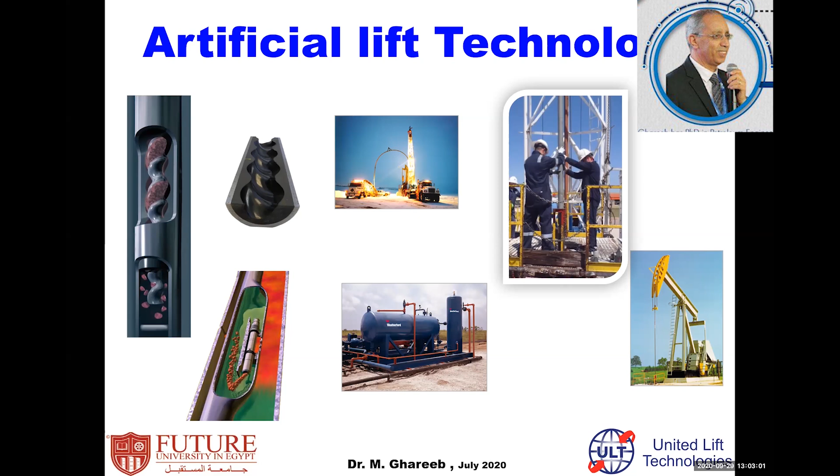We mentioned that as an artificial lift, this is the main common type of artificial lift. There are a few other types, but they are minor used. Worldwide, this is the main common type of artificial lift used, and so on.

We stopped last time for the progressive cavity pumping system at these slides. We said that the progressive cavity pumping system is one of the main artificial lift systems used for heavy crude oils. It represents the best type of artificial lift system that can be used if you have heavy crude oil with sand and so on.

It represents one of the best artificial lift systems regarding total system efficiency. If you look at the total system efficiency compared to other artificial lift methods, the progressive cavity pumping system, or the PCP pump, represents the highest total system efficiency. That means the losses in power, in horsepower, are much less compared to other types of artificial lift.

We mentioned that the main component, the main part of the system, is the downhole pump, which consists of two main parts, rotor and stator, plus the drive head, plus the rod string, which transfers the rotary motion from the surface equipment to the downhole equipment, and so on.

In order to understand the design, how to design the system, what we need to consider in design, we need to understand the pump and the factors affecting the design, because mainly I design the system, any artificial lift system, any type of artificial lift system, to produce the desired production volume that I need from my wells based on the well productivity.

Not only that, but also to lift it to the surface with a certain wellhead pressure capable of transferring the produced fluid to my process facility or separators or whatever. Then I need two things: production as a volume, and head as a lift, head, either by feet, meters, PSI, whatever you have.

Then in order to understand how the PCP is working, how it generates the pressure or the lift, how it's produced, what's the function of the production related to the PCP, you need to understand the system, the geometry of the system, the configuration of the system, and so on.

The PCP, or progressing cavity pump,

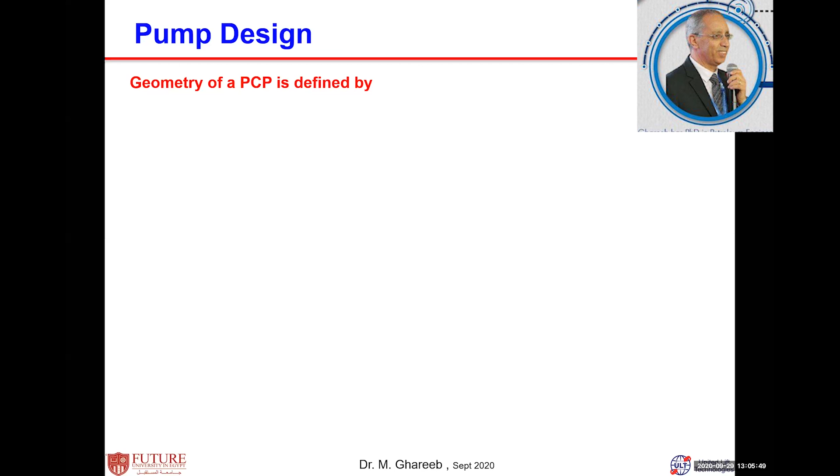Remember, I said that downhole pumps have two parts, the rotor and stator, the rotor rotating inside the stator. One of the main important parameters in the geometry is the rotor's diameter. What diameter do these rotors have? The rotor diameter is the cross-section diameter of the rotor. But remember, these rotors are not a straight bar of steel.

No, the rotor has a different shape of steel. Then I have two diameters in the rotor. One is called the minor diameter, the normal diameter of the rotor, also called nominal diameter. This rotor, when it rotates around itself, has a major diameter. Major diameter is the bigger diameter.

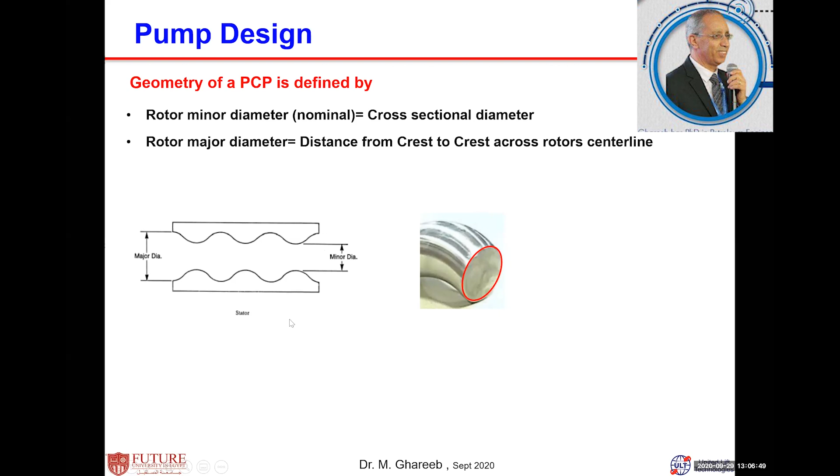In the rotor, major diameter is a distance from crest to crest. Because as the rotor runs inside the stator, this is a crest and this is a crest. This is the shape of the rotor. From here to here is the rotor minor diameter. And from here to here is the rotor major diameter.

From this crest to this crest of the rotor, it is rotating around its center line, around its shaft. Then you have two diameters here for the rotor: the minor diameter, the small diameter, and the major diameter, the big diameter, like this.

Plus eccentricity. If you look at the rotor and stator, there's some eccentricity. As it's rotating, you have two center lines here: one center line for the minor diameter, and one center line around the major diameter. Then between these two, there is a cavity area, a small area called eccentricity.

Then the eccentricity is the distance between the rotor minor and major center lines. From this to this area is called the eccentricity of my rotor.

And so on. Plus, I have another factor. What is a pitch? Pitch is where the fluid can accumulate, here and here and here, like the stages, where it can hold the fluid. There are different pitches here. There is what we call the rotor pitch, from crest to crest. This is the rotor pitch, from here to here.

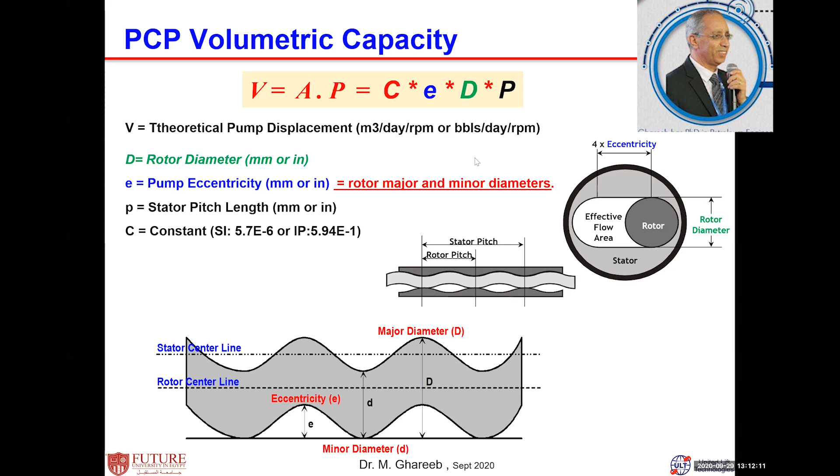If you rotate your rotor one turn, this will be the displacement. But usually I design my system to rotate more than that in order to achieve my production. Based on the production I require, I rotate my system, and the number of rotations is equivalent to the production I need. Then the volumetric rate of my production, the theoretical rate, is equal to the theoretical pump displacement multiplied by the number of rotations, just how many turns the PCP is turning.

But remember, during operation there is a differential pressure across each stage, and due to that differential pressure there will be slippage of the fluid. Part of the slippage will go back again to the previous stage because of the delta P, and this depends on the type of materials, what the seal line or seal points are, how much the rotor and stator seal to each other — all that affects the volumetrics, or what we call the slippage flow rate.

There is a part of the flow rate with slippage, which is a function of the volumetric efficiency of this system. The slippage rate is dependent on the rotor-stator fit, how the rotor and stator fit to each other. The rotor-stator fit is really a function of the pressure, how much pressure I need to build up, and so on — there are different factors and parameters that affect that.

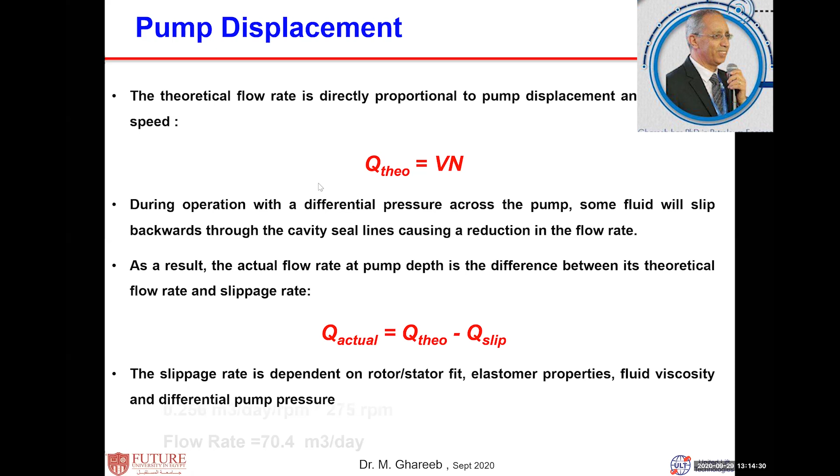Now this is an example in the metric system. I'll show you how to calculate the pump displacement and theoretical flow rate, the pump displacement per RPM, and the theoretical flow rate. With the pump: eccentricity equals 6.2 millimeters, rotor diameter 39.2 millimeters, and stator pitch is 185 millimeters, operating at a speed of 275 RPM. First, I need to calculate how much displacement per 1 RPM, per 1 revolution.

According to the metric system, I need to use this constant value, multiplied by E which is the eccentricity, multiplied by D which is the rotor diameter 39, multiplied by the pitch. Then the pump displacement equals 0.256 cubic meters per day per 1 RPM.

This gives me a good configuration of how much production I need as a function of each 1 RPM. If I run the pump at 100 RPM, what will be the production? At 200 RPM, what will be the production? At the end, the theoretical pump displacement downhole will be the displacement per 1 RPM multiplied by the RPM, how many revolutions per minute.

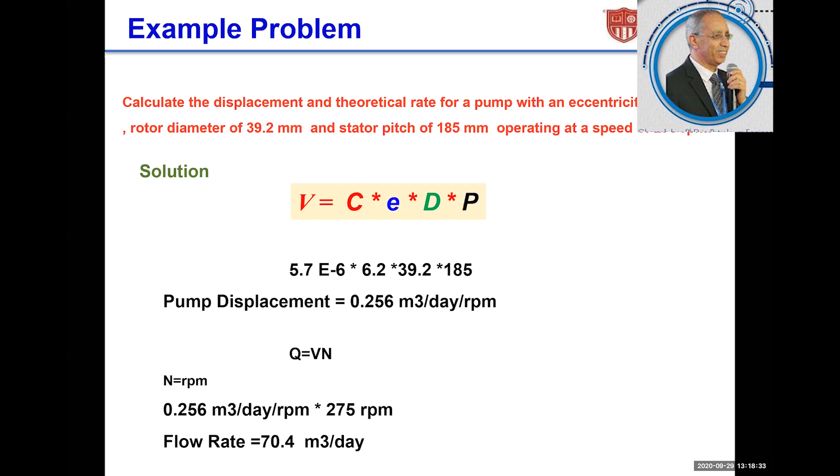A high percentage, the majority of conventional pump models have a nominal lift capacity of around 70 psi per stator pitch. For each pitch of stators, I have 70 psi. That means for each cavity, since the stator is 50% of the cavity, you have 35 psi per cavity. This is a cavity at 35, this is a stator pitch at 70 psi. That means if I want more pressure, I need to increase the pump length to get more pressure than that.

There is another value for pumps that can be built instead of 35 psi, because other pump manufacturers can manufacture pumps with different downhole configurations, and this also depends on the lobes of the pump and how many seals it has. So yes, this figure can be a little different, but if you don't know anything and start to talk about how much pressure, use that value, 35 psi per cavity or 70 psi per pitch.

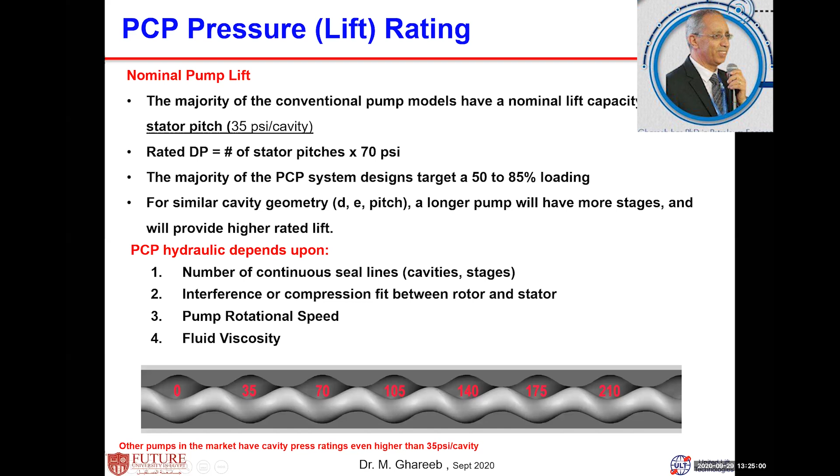Fluid viscosity - all these factors affect the hydraulics of the pump. Then, for design and selection, try to remember all this when you start to use software or do hand calculation. I recommend using software for ease.

For the completion information, you need to have all that. What is the setting depth? Because setting depth is a function of the delta P pressure you need to build, with a function of the reservoir pressures and so on - bottom hole temperatures will be a function of the depth. Well deviation - I need to have well deviation. What's the maximum on this well?

Especially the diameter of the tubing and so on, and gas separator or sand screen, what I have downhole - there is a tailpipe, all the downhole, and what type of downhole configuration I have - all this I need to consider while designing my system.

Also the operating and production information - what is the total liquid rate? Remember, total liquid rate is oil and water and so on. What is the total flow rate? Oil, liquid plus gas, water cut, sand content or sand cut, maximum and minimum operating RPM.

What's the maximum RPM I should run, or is there a specific minimum RPM? This is just a mechanical fact you need to consider based on the availability of your equipment or system, plus tubing size and head pressure. What's the wellhead pressure against what pressure I need to flow or pump my system?

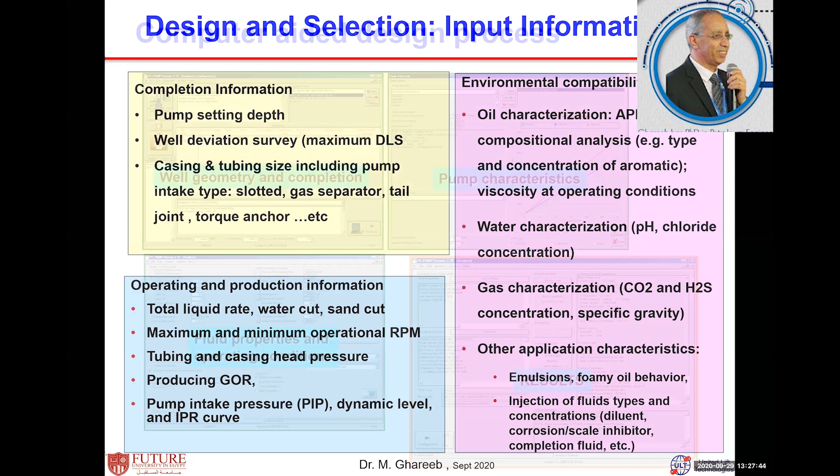However, as I said, hand calculation can be easy and useful for a very simple condition, but it's not accurate. Usually for PCP, you need to consider a lot of factors - you need to simulate a lot of downhole conditions and parameters.

Depend on what? Depend on my pumps and pump configuration, manufacturing, equipment types, metallurgy of downhole equipment, well completion condition, well deviation condition - a lot of factors. Usually software takes from you all the parameters we have; it will ask you about a lot of parameters for the simulation.

There is also input needed from your side to select what parameters you need to input, because if you input the wrong parameter, you will get a wrong design or an inaccurate output result. However, there is software that can help you a lot, but in order to run the software, you need to understand what to put in it.

Software sometimes gives you two choices - do I need to use this or that? You need to decide this or that based on your background about the system, how the system runs, and how this affects it.

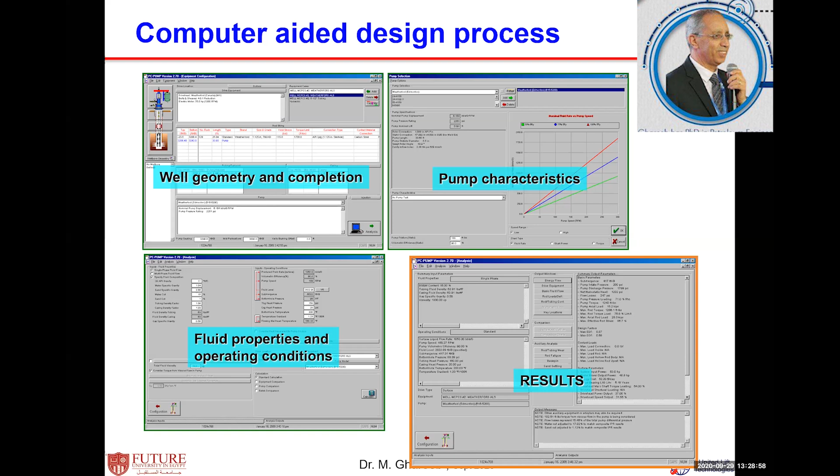This is just a general overview about PCP design. At the end, like artificial lift, like the PCP, the ESP, and so on, the pump can have some nomenclature, usually according to ISO. The pump nomenclature has parameters - the first parameter tells you how much the pump can produce, how much pressure the pump can build. Usually the nomenclature starts with the nominal capacity of the pump.

How much, either cubic meters, this depends on what units you use. Either it will be cubic meter or barrel per day, nominal diameter for 100 RPM. For example, this one tells you this pump can produce 32 cubic meters per day for 100 RPM. If I run the pump with 200 RPM, then this pump can produce 64 cubic meters per day.

And this is the second number, it's the nominal head in meters. This pump can lift 1,200 meters as a nominal head. And also this third number is dependent on the manufacturer, and this can be different from one manufacturer to the other.

And it's very important, it's the elastomer code. It's very important to select this correctly, because elastomer is 50% of your pump, part of the pump. Elastomer is one of the main sources of downhole pump failures. Remember, elastomer is the weakest point. Elastomer is the main source of downhole pump failure.

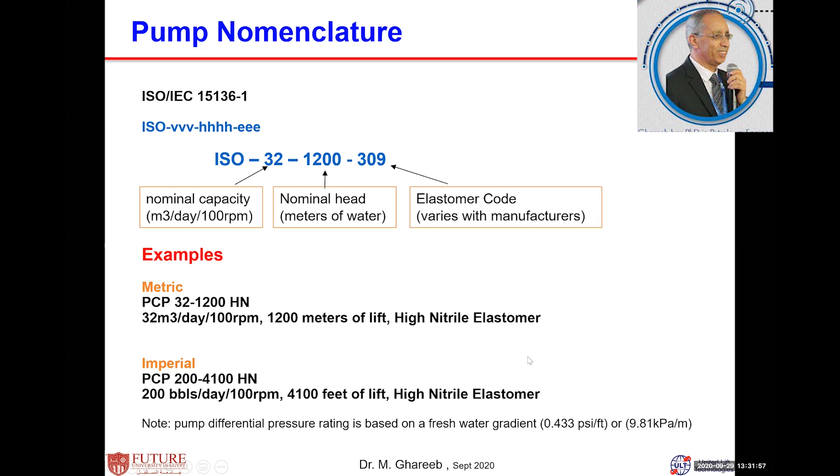Then pump differential pressure rating also is based on, this is all when the manufacturers give you the rate, based on fresh water gradient. Because they did the test here in their plant or workshop, they do the test by using fresh water. Then you need to convert this, if you want to calculate by feet or meters, you need just to convert this to your fluid type.

Let me give you some hints about fundamentals of gas lift. What is gas lift? How does gas lift work? What is the main component of gas lift? Remember, this course is a fundamental. You need to know the components of the system, because you will not be able to design, you will not be able to troubleshoot, you will not be able to analyze the system if you don't know the main components. What's the component of the system, how it's working with each other, how it reacts to each other, and so on.

Gas lift is one of the common artificial lift systems, but the percentage of use is less than rod lift, less than PCP. It can be the same like progressive cavity, in some areas can be high, in some other areas can be low. However, gas lift is one of the good artificial lift systems that can be used offshore if it is capable to lift my fluids, because the gas lift, as we'll see later on, it's like a flowing well.

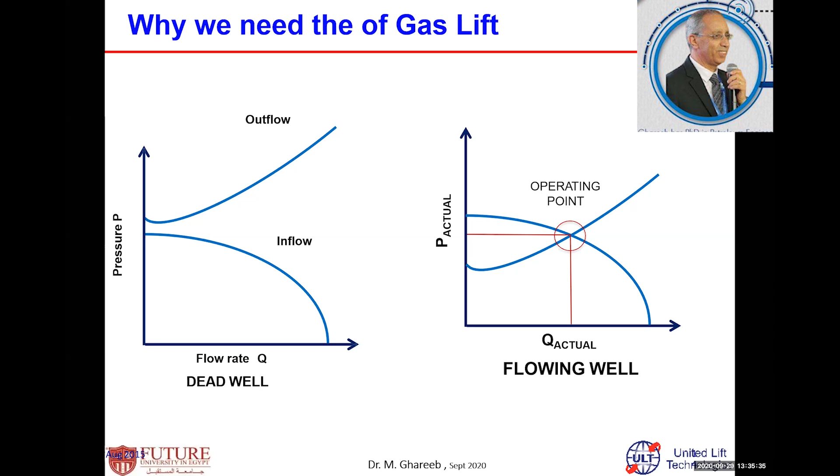What is the gas lift? Gas lift is a form of artificial lift. In most conditions it closely resembles the natural flowing well. This is a flowing well, this is the casing, this is the tubing, this is the packer. Fluid comes from the formation and there is enough bottom hole flowing pressure, capable of lifting the fluids up to the surface and overcoming the pressure losses inside the tubing and the wellhead pressure in order to reach the flow.

This is a flowing well. If you look at gas lift, it's almost the same completion, packer, flowing well, except I'm increasing the volume of gas relative to the liquids. So I just simulate it like a flowing well with some gas artificially injected, making it an artificially flowing well.

The gas lift usually uses natural gas, compressed and entering the tubing at a certain point at the bottom, where it mixes with the produced fluid and lifts this fluid.

The compressed gas can be natural gas - the majority of gas lift wells use this - but in some small, special cases it can be air, under certain precautions, or a mixture of gas and air, for small applications in shallow wells. However, over 95% of gas lift wells use natural gas to produce.

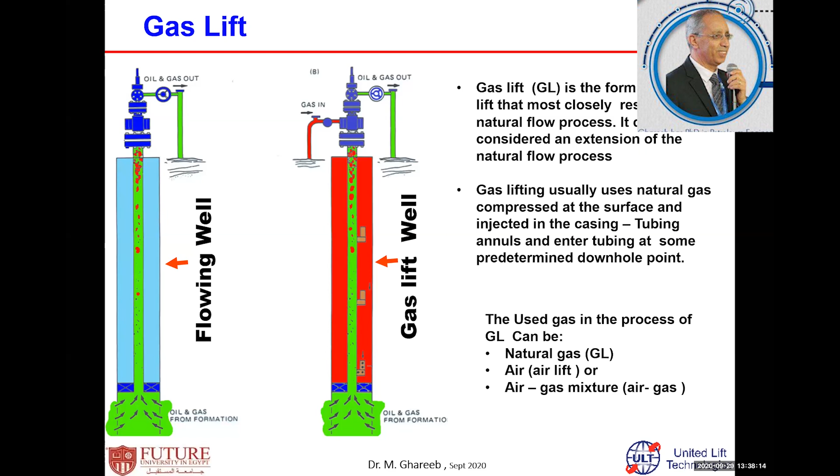What's the advantage of gas lift? Since it's like a flowing well, it has plenty of advantages. Gas lift has a high degree of flexibility in design rate, because I can change the volume of gas, I can change the depth of gas injection, and I can do a lot of simulation to have flexibility in my production. I can change my outflow curve up and down, depending on downhole conditions.

The gas lift is a very simple artificial lift system. There are no downhole pumps - all the gas lift downhole equipment is mainly downhole valves. I can retrieve or run and do all the downhole operations using wireline retrievables, slick line, with just a very small tool at the surface, to retrieve these valves.

For that reason, gas lift is one of the good artificial lift selections for offshore operations, because it doesn't require a rig. If I have any problem, the equipment needed is very small, just 1 ton or maximum 2 tons, and I can send it to the platform, do the operation within a few hours, and send it back using the helicopter.

It can handle sand conditions very well because there is no moving part, and the tubing is open and full like this, allowing for tubing drift. If I need to run any wireline operation, PLT operations, through-tubing perforation, or whatever downhole operation, I can run it inside the tubing, just like a flowing well.

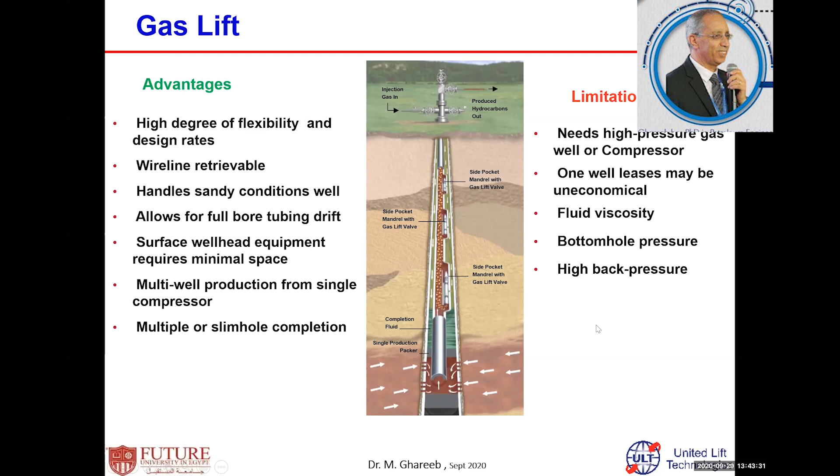Then, gas lift - as a principle of gas lift, let me talk you through a little bit about what is the principle of gas lift. We said gas lift is similar to a flowing well but with injecting gas - it's artificially making the well flow. What is the principle of gas lift? What is a conventional gas lift? If you look at this one, it's my normal completion.

When they inject gas here, the gas mixes with the fluid inside the tubing. This reduces the fluid gradient and helps push the fluid up inside the tubing and up to the surface. The gas is injected into the annulus - meanwhile the gas travels down the annulus like this, and there is a regulator, called the gas lift valve, which regulates the amount of gas I need to inject inside the tubing.

Then the injected gas, mixed with the fluid in the tubing, reduces the density of the fluid to a point where my bottom hole flow pressure can lift this fluid to the surface. This is a very simple way of how gas lift works. Usually only one valve of the gas lift is operated. Even if you have more than one valve in the gas lift completion - we'll see later on why I have more valves - in normal operation only one valve is working, just injecting gas inside the tubing.

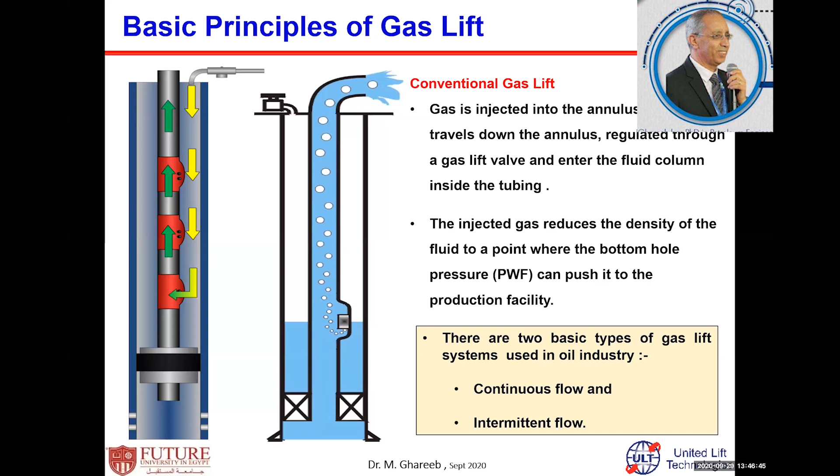If you look at this shape, continuous flow means if I continuously inject gas in the casing over 24 hours, continuous gas, it doesn't stop, that's a continuous flow gas lift. What if I inject gas lift as a cycle? I inject gas for a period of time, then stop for a few hours, then inject gas again, stop again, inject again. This is what we call intermittent gas lift, so the gas injection is not continuous. When do you use that, and what's the difference between intermittent flow gas lift and continuous gas lift?

Let me give you some hint about continuous flow gas lift. In the continuous flow gas lift process, relatively you have gas at a certain high pressure continuously injecting into the casing, which then enters down through the downhole valves to the tubing and mixes with the tubing fluid.

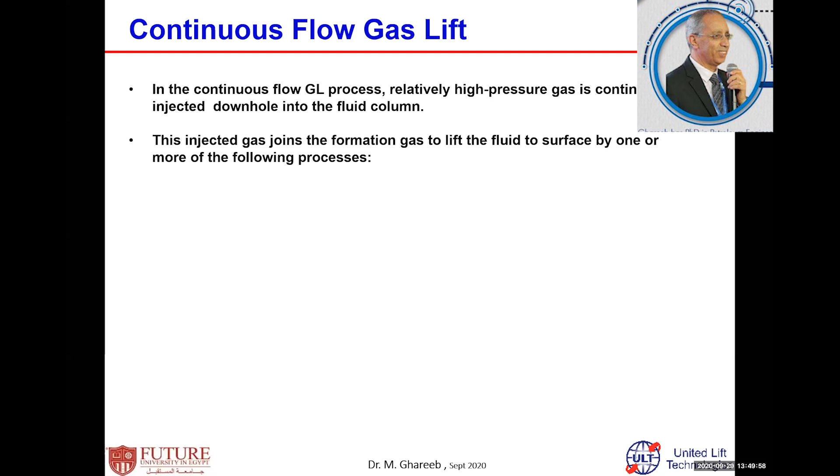Remember, when you have two-phase flow inside the tubing in the vertical line, there are different flow regimes depending on gas-liquid ratio, flow properties, the gas, the temperature, and different factors. Then when the gas mixes at the valve, the injected gas with the formation fluid, the first principle is just lifting, or helping the gas flow to the surface. The first principle is reducing fluid density, mixed with that.

If it's a bubble flow like that, or just some mixing fluid, this is what we call gas, and this is liquid - we have mixed flow of gas in the liquid like this. The first principle here is reducing the fluid density, and consequently reducing the weight of the fluid column inside the tube.

The second technique, or second help for the gas, happens when the gas starts to go up - the pressure in the gas starts to decrease, then the small bubbles of gas start to expand and become bigger bubbles of gas. The expansion of the injected gas, commingling with the gas in solution, pushes the liquid ahead further. This works by pushing the gas, pushing the liquid, and helping the flow push up to the surface.

Not only that, there is also displacement of liquid slug. When the gas starts to go up more, the bubbles of gas increase, and the flow regime starts to become like slug flow. For slug flow, each slug of gas pushes a certain volume, like a different type of artificial lift.

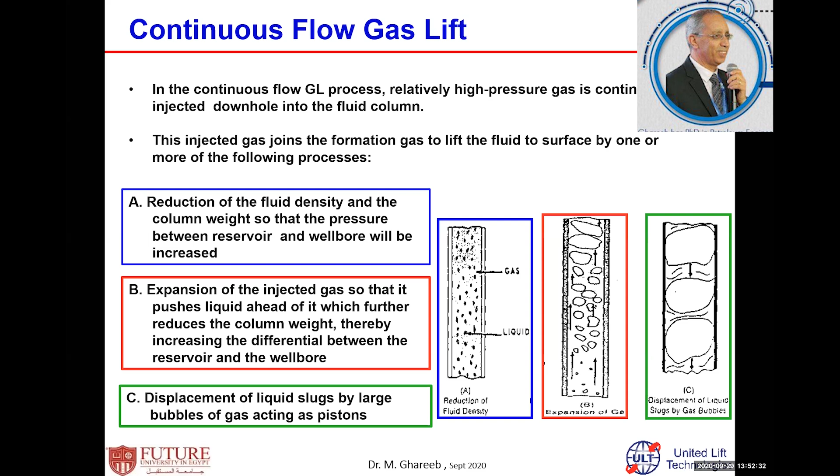What for intermittent gas lift? How is it working? Intermittent gas lift is usually used for low producer wells, low productivity wells, low permeability wells, wells which cannot produce continuously but still have a good quantity of gas. There's a good quantity of gas, but the downhole pressure is low. Then what we use here is what we call gas assist. The gas lift assists the well to flow.

This is what we call fluid accumulated downhole with time. When the fluid is accumulated downhole, due to the length of these fluid columns, the pressure is not able to lift it to the surface. Then if I use gas lift, I put a gas lift valve down to a certain depth downhole in the well near the packer, and inject gas. When I'm injecting gas, the gas comes here and pushes this slug of the flow here, and lifts it to the surface.

Then in intermittent flow gas lift, fluid is allowed to accumulate. What this means is I stop the well for a period of time, then the formation starts to produce inside the well, but not up to the surface. It produces inside the well until a certain static condition is reached, then the well is stopped. This is what you call the inflow cycle period inside the well.

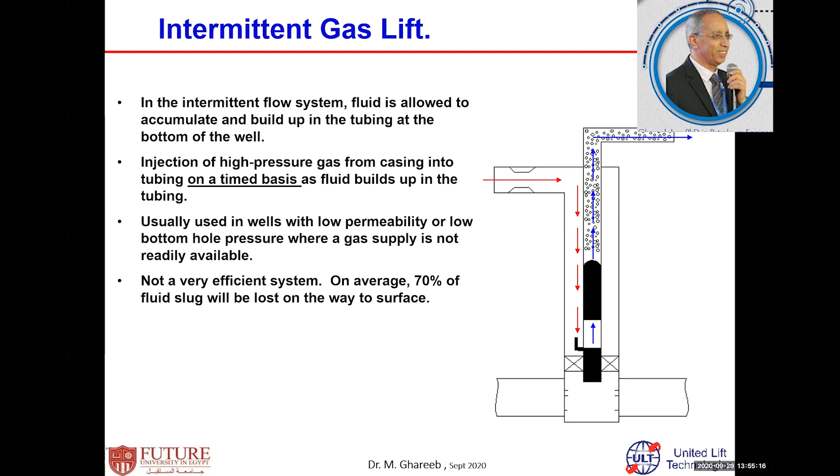What is a gas lift component? This is to achieve the benefit for me, or to make this gas lift work, and so on.

As with all types of artificial lift, they have two main parts: surface components and downhole components. For the gas lift, the downhole component is a simple component. Mainly, it has what we call valves. This is the main component, the critical component in the system. It's called the gas lift valve, like the pump in a pump system. In the gas lift, the valve is the heart of the system.

Then I have the gas lift valve. But for other types of artificial lift, usually I use one pump. For the gas lift, I use more than one gas lift valve. For sure, there's a difference in some settings and so on, but there is more than one gas lift valve installed inside it.

But how is this gas lift valve installed inside the tubing? Usually, the gas lift valve is installed inside the tubing in this area, inside a device called a mandrel. This is what we call the mandrel, in which the gas lift valve can be placed.

Then for the completion of my well for the gas lift, usually I run the tubing with the mandrel connected to the tubing at the depth which is designed beforehand. I design where I need to run my gas lift valve. Then I say, okay, I need to run the first mandrel at 100 feet, I need to run the second mandrel, for example, after 1,200 feet.

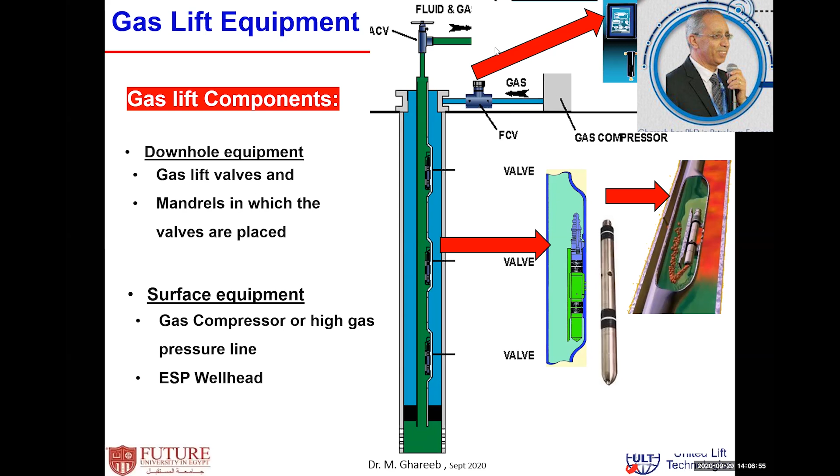Other equipment—one of the main equipment for gas lift—is the gas lift valve, and the gas lift valve is the heart of the system. The gas lift valve is usually used to control the flow of injection gas—how much gas I need to inject inside the tubing. The gas lift valve is placed inside the mandrel like this, and when it's open, it controls the volume of gas that can flow inside the tubing, depending on the pre-designed volume of gas needed to create a certain gas-liquid ratio in order to lift the well. When it's placed, the gas lift valve inside the mandrel creates a kind of communication.

If you look at these ports, there's a port inside the mandrel, and it's against the port inside the gas lift valve. When these ports communicate with each other, gas is injected into the casing, and when the gas lift valve reaches a certain delta P between casing and tubing, it's open and allows a certain volume of gas to go through. The operation of the gas lift valve is determined by preset opening.

Usually in the lab, I preset the open and close pressure for this valve by injecting a certain volume of nitrogen gas. There's also an old type of gas lift valve that uses a certain spring inside. I preset it so that if the delta P across the valve reaches X PSI or X bar, the valve should open and allow gas from the casing to enter the tubing.

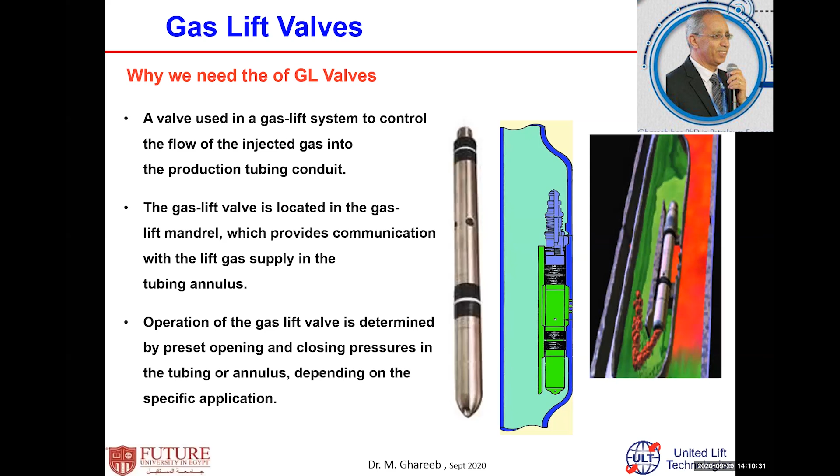The main category of valve type depends on when I need to use a gas lift valve, and what the function of this gas lift valve is.

In a completion, if I have more than one valve, the additional ones are called unloading valves. If I have only one valve, it's called the operating valve.

As a principle, all gas lift valves are designed to stay closed, until a certain condition of pressure in the annulus and tubing is met.

What does that mean? Usually the valve is preset at surface. Then, until I reach a certain pressure across that valve, the delta P between the casing and tubing, the valve will stay closed. When I reach that certain delta P, the valve will open.

For that reason, I put a certain number of gas lift unloading valves, in order to help reduce the horsepower and the gas pressure required to start the well, especially if the well is stopped or has just come off a workover condition.

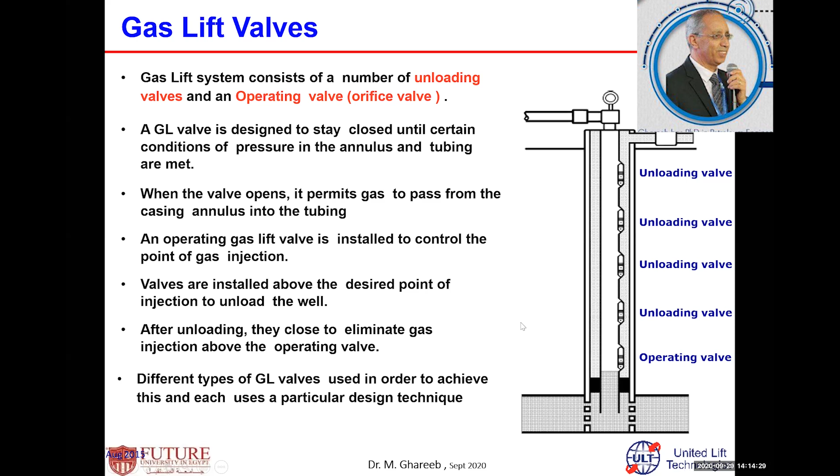So the gas lift valve is divided into two main categories, both as a principle of function and in terms of operation principles.

The manufacturing found that it's needed to have a different valve due to well condition and the need of the wells. However, I will not go into details of that, but I would like to show you what type of valves are in the market and how they respond.

Usually there are two main types of gas lift valves in the market. One is called injection pressure operated gas lift valve, IPO, which usually responds to the injection gas pressure. The other type is production pressure operated gas lift valve, which responds to the flowing production pressure. One responds to the pressure on the casing to open or close, while the other's response depends on the pressure of the fluid flowing inside the tubing.

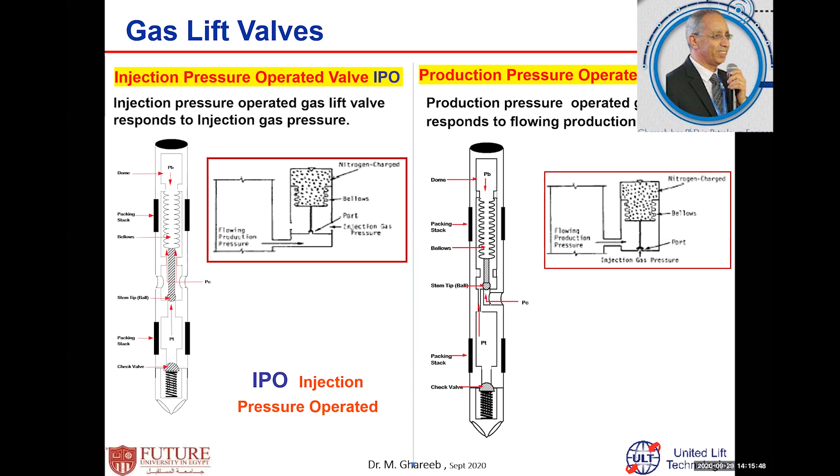Gas lift valve - what's the function of the gas lift valve, and how can it help me? First of all, as I said, it helps me in unloading the wells, just to reduce the volume of gas and reduce the pressure of gas required to inject for unloading the wells and so on.

It also provides flexibility for any change in the well. I can adjust the volume of gas and adjust the production depending on the downhole condition - if the bottom hole flow pressure changes, if the water cut increases with time. Do I need to increase or decrease the gas volume? Do I need to change the depth of gas injection? What daily production do I need - do I need to increase it, or do I have a problem and need to reduce it?

Well deliverability and so on - that means the gas lift valve provides me the means of controlling gas injection and controlling well production. It allows me to optimize the well and control it to produce as per my request, depending on the downhole condition. I can change the parameters to match the downhole condition, the well condition, and so on.

For unloading, let me give a quick view to help understand the sequence of unloading and how it works. This well, for example, is full of liquids in both casing and tubing - the same liquid. If you measure the fluid gradient inside the casing and inside the tubing, it's the same gradient, since it's the same fluid.

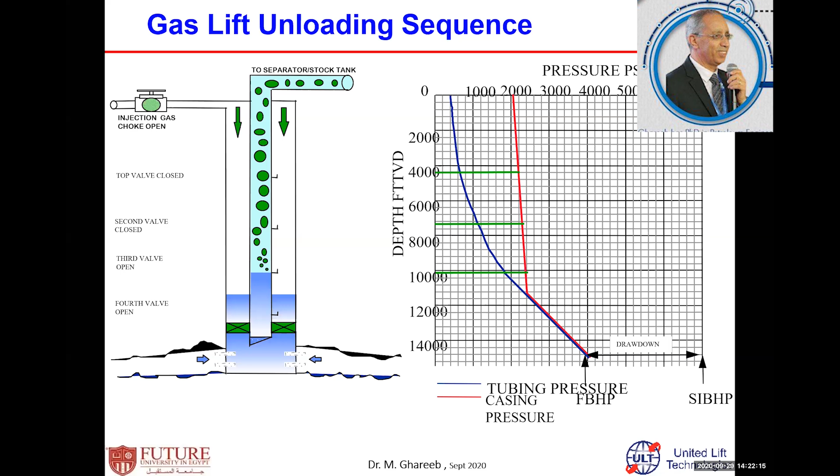The second part in my gas lift equipment is the gas lift mandrel. What is a gas lift mandrel? As I said before, the gas lift mandrel is a place in which the valve is placed, the equipment in which you place your valve. This is the main function of the gas lift mandrel.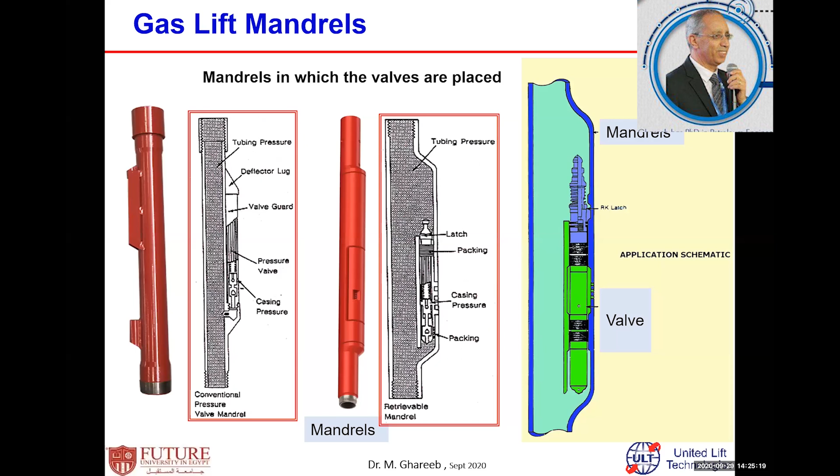Since it's flowing wells, you need all the parameters that can affect the flowing wells. You need to know all the parameters which allow you to select the suitable gas lift valve, how to select the depth of the gas lift valves for unloading, and how to select the depth of the operating gas lift valve, and so on.

Then I need to know, because I will run this gas lift valve as a conventional or as side pocket mandrel, what's the tubing size, what's the casing size, and what's the depth to the center of perforation?

Because I will inject gas, I need to lift fluids. In order to lift fluid, I need to calculate the bottom hole flowing pressure. Here I work with the bottom hole flowing pressure, not the pump intake pressure.

Then I need to know the depth of perforation, the fluid API gravity, and the formation gas liquid ratio. This is one of the tools that can help me know if it's high or low, and by how much, in order to calculate the new gas liquid ratio, the production and injection pressure, and so on.

Specific gravity of the injected gas and the produced gas. Do I use the same produced gas to inject, or a different gas? If I use a different gas, what specific gravity is it? What's the daily production? Specific gravity of water, if there is water.

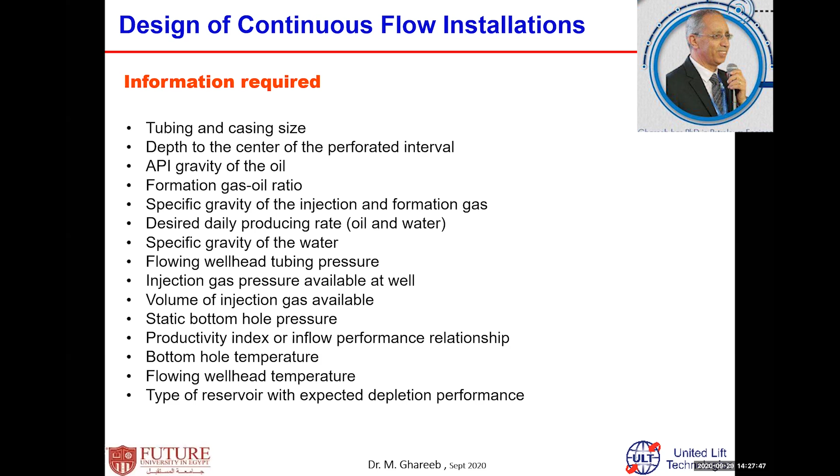There are several different methods you can use for designing gas lift. One of the methods depends on, remember the two main valves I mentioned, whether I will use IPO valves, injection pressure operated valves, or production pressure operated valves, and so on.

Do I need to use a manual calculation? Usually manual calculation is not accurate. There's a lot of error in manual calculation. It can give you rough figures about what to have. Some people use it when it's not a high gas oil ratio, and you control the gas oil ratio.

For gas lift wells, you need to simulate the flow regimes, the vertical flow. Remember I said continuous gas lift depends on three processes inside the tubing: either reduce the fluid gradient, use slug flow or plug flow, or use mist flow - whatever type of flow supports and helps you produce the well.

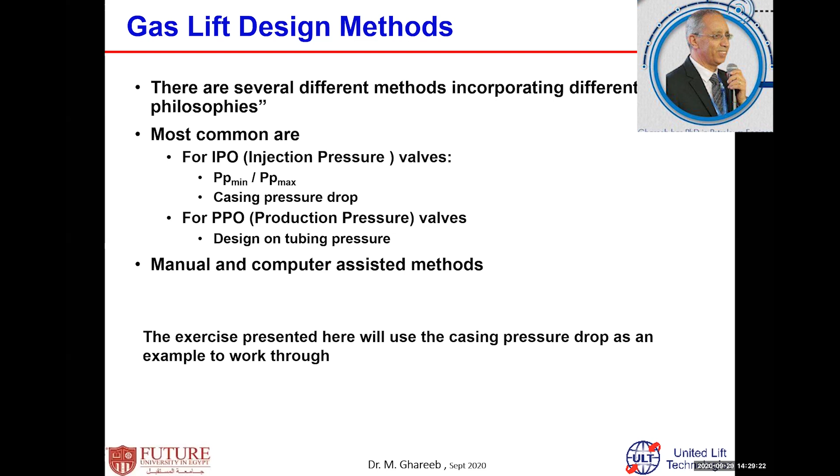There is a small exercise you can find in artificial lift books that can help you learn how to size this by hand. However, I will give you some small hints in order to illustrate this.

For example, assume I have a well like this, and I need to calculate the depths for each valve. Usually for hand calculation, you need a paper like this, and you draw the pressure against the depths. You also need to know the depth of the perforations and the depth of the packers.

Where do I need to put the packer above the perforation? Because all your injection will be above the packer, and below the packer will be only liquids. I need to consider all that in the design, and in calculating my bottom hole flowing pressure, because this depends on what the new bottom hole flowing pressure will be in order to allow the well to produce.

In order to know the depths for this valve, I will just show you the smallest example, and the other steps you can find later in some books.

Remember, this is mainly a practical course, not a theoretical course. We don't just show you how to design or calculate like you study in university, but here we try to show you some practicals. Generally speaking, first of all, as a first step, you need to know what gas I have available.

What's the available injection pressure I have in my system, because there is trial and error in this hand design calculation. It depends on the surface gas, your surface equipment, how much the surface equipment can generate in terms of pressure, and what maximum pressure can be generated.

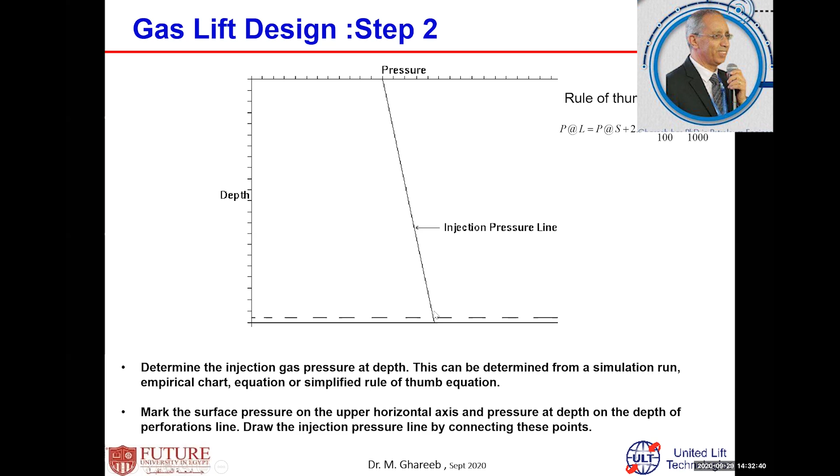When you calculate these new pressures, you draw a line between the surface pressure and the injection pressure. Then I need to know what fluid I have inside my tubing - what fluid I need to unload inside the tubing. Is it water, killing water from the workover or from drilling, or just liquids, oil, whatever I have.

However, depending on the type of fluid you have inside your tubing, you will draw from the zero depth line and zero pressure line a line representing the static gradient for the fluid inside the tubing and casing, because it's the same fluid in this one. Then the second or third step.

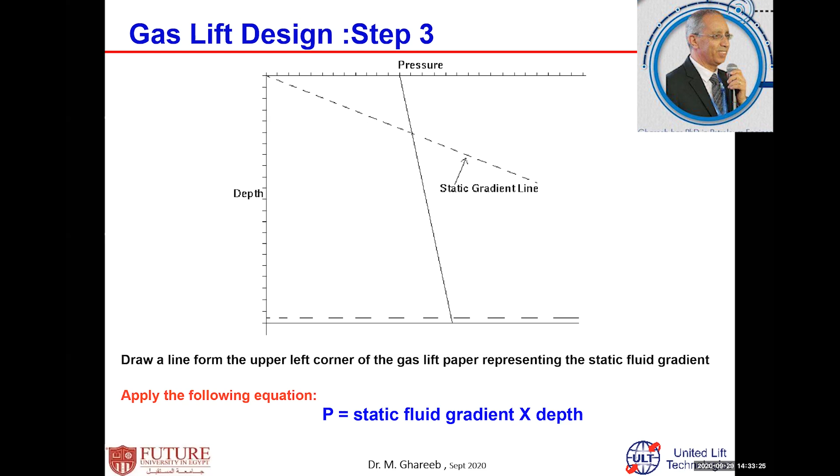Then I need to also calculate the gas liquid ratio, because I need to know - I will inject gas, but there is also gas produced from the formation. What will be the gas liquid ratio I will inject? If there is no gas produced from the formation, then the gas liquid ratio I will use is the volume of gas I will use at the surface.

But the unloading gas liquid ratio is usually equal to the available injection gas volume divided by the desired production - what production will I produce? This is if I assume a dead column and no gas coming out of solution. If there is gas coming out of solution, I need to consider that and calculate accordingly.

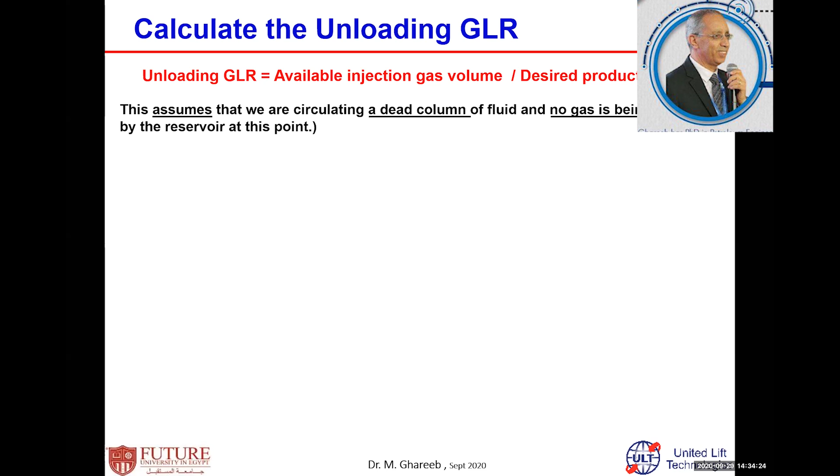Then, after I calculate the gas liquid ratio, based on my parameters - what tubing size, what is the other side, what fluid gravity, water specific gravity if this is water or not, how much percentage of water, how much production I need to produce - this is what gives the lift performance curve.

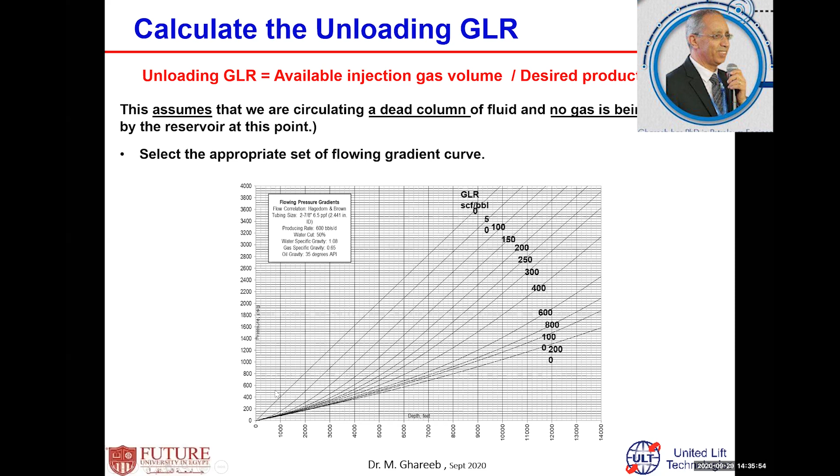Then I use this chart and this curve, and I put this curve over this chart, and this represents the curve. I take this one exactly, put the two papers one over the other, and use this one - you can say overlay the gas lift paper on the curve and track the curve representing your condition. This is how we design the unloading gas lift.

Then I have three gradients, three curves here: gas, static, and the condition after I work, after I inject the gas. Then how I select the gas lift valve, where will be the first gas lift valve, and so on. Based on that, I start to do what?

Here, you usually use a triangle and rulers, and draw a parallel line to the static gradient. This is a static gradient, my static gradient. Then I said I have three curves: this one, and also this one, and this one.

I draw the parallel line from my static curve until from the point, the wellhead pressure point. This is a wellhead pressure point, which I draw my curve as a wellhead pressure point. Then I draw the line from the wellhead pressure line parallel to that static line, until it intersects with the pressure of the gas line at this point.

For the operation principle and the condition of the valves, in order for the valve to be open and closed, usually locate the point on the static gradient where there is at least 30 psi of differential pressure between the casing and tubing, because you need to have delta P between the casing and tubing in order for the valve to open.

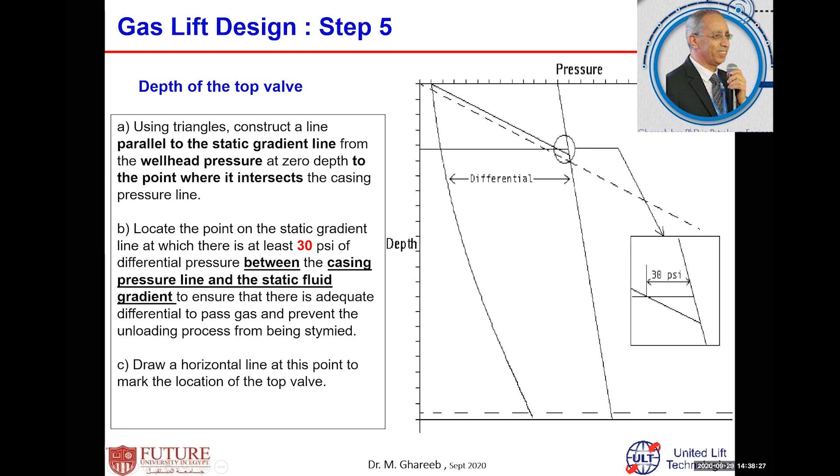What is the second gas lift valve? The first gas lift valve, since I'm injecting gas in the gas lift valve, is sensitive to gas and will open with delta P of gas, especially for the first type, the valve which is sensitive or operated by the injection gas. I need to know the temperature at that depth, because there is a temperature gradient.

You need to draw that temperature gradient, because you need to do some correlations and corrections about the gas and the gas lift valve, and the opening pressure of the valve. Then determine the valve temperature as gas lift depth 1 in the top of your table. The temperature can be calculated from the temperature gradient and so on.

However, you can do the second valve, third valve, until you reach the bottom using the same technique. But there are a lot of software in the market that can do this very easily for you if you enter good input data, because hand calculations are sometimes misleading, especially if you're not using the exact two-phase flow correlation.

Remember, this curve depends on what? It depends on the flow correlations, assuming all the gas will be mixed homogeneously with the fluid. But in reality, this doesn't happen. When you have two-phase flow inside the tubing, there will be different flow regimes: bubble flow, slug flow, mist flow, annular flow, all types of flow.

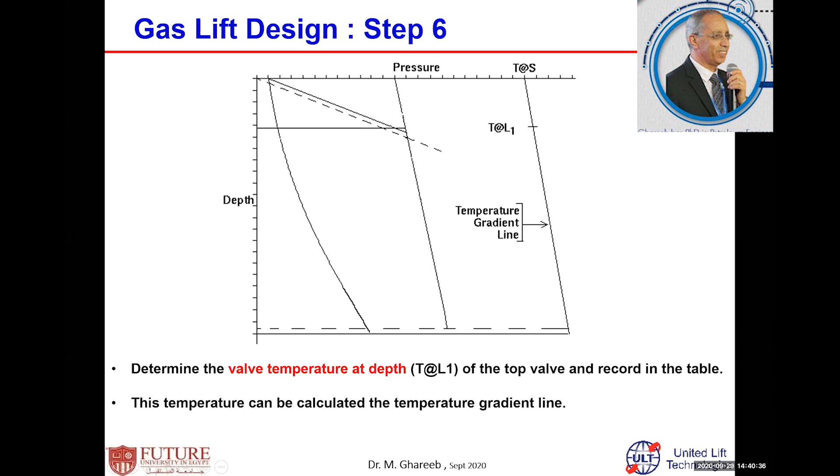Depending on what flow regime you have inside the tubing, this curve will be completely changed, and the depths of the valves will be slightly changed from what you designed. However, this is one output of the software you can use for sizing your gas lift system or designing a gas lift system.

One important point during operation: someone might ask, since gas lift is good, why not inject more gas to produce more liquid? No. There is an optimum volume of gas to be injected to reach your desired production. If you inject too low or too high, you may lose production.

With high injection, you lose production because if you inject more gas, sometimes the gas will slip and leave the fluids behind, because the velocity will be high. After a certain volume, this is just a general relationship between production rate for a certain well and the injection gas rate.

When you start to increase the injection gas rate, your production rate will increase until a certain area we call unstable gas injection, because there is no stable gas injection and it can fluctuate. Production will increase until you reach the optimum gas rate. After that optimum gas rate, whatever more gas you inject, you will not gain more production, and sometimes production will even decrease.

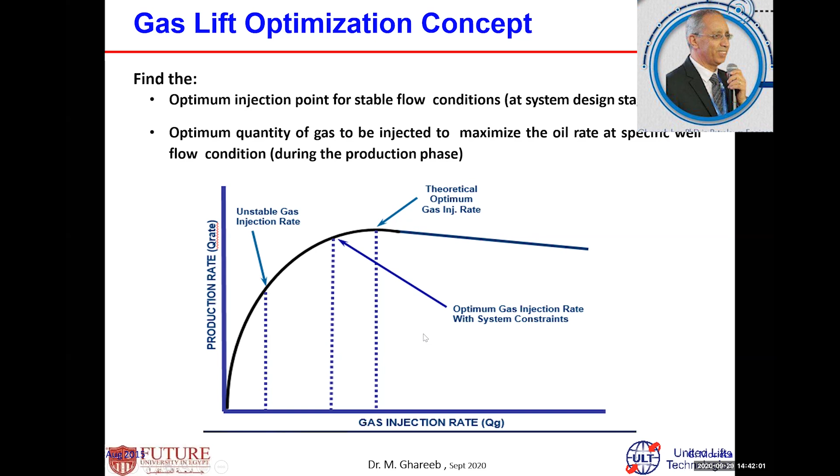There is another important point for gas lift. The unloading valve is different than the orifice or operating valve. I put this here for you to see the difference between the valves and how the gas lift valve works. There are different types, even for the orifice gas lift valve - different types, sizes, and materials. This is just a quick overview about gas lift.

Let me give you some more basic information about the jet pumping system. Jet pumping system is one of the artificial lift systems. It's called a dynamic displacement artificial lift system.

Its general description is a hydraulic pumping artificial lift system, because there are different types of hydraulic pumping systems - what we call jet pump and piston pump. However, the jet pump is one of the main common artificial lift hydraulic systems used.

The hydraulic artificial lift system is operated by pumping, instead of pumping gas. For gas lift, we compress gas into the tubing or casing in order to produce. Here, we pump fluids into the well in order to produce the fluid. You can pump either from the tubing and produce from the casing, or pump from the casing and produce from the tubing, depending on the condition.

This is a downhole pump configuration - it's only a hydraulic pump with very small tubes inside, different configurations and so on. I inject fluid, which is called power fluid, and the injection pressure is called power pressure.

The jet pump is the hydraulic dynamic displacement artificial lift pumping system. The advantage of this pump is there are no moving parts. If we look at this pump here, there are no moving parts in it.

Also, it can produce high volume. When I start looking at wells producing high volume, one of my first choices is the jet pump, like ESP or gas lift. It's a free pump style - I can pull and pump. I can retrieve the pump from the well without any intervention inside the well, either wireline or other operations. By changing the direction of the injection, I can just retrieve the pump out of the well.

Since there are no moving parts, the only thing moving is the hydraulic fluid. This makes it excellent for deviated wells. I can use one surface equipment to feed different wells and so on.

The limitation is that production rate is relative to the bottom hole pressure. Since I inject fluid at a high pressure, sometimes this high pressure, in order to lift the fluid, creates a little back pressure. I reach a certain limit - more than that, I cannot reduce the bottom hole pressure. It requires a specific bottom hole configuration in order to set the pump.

However, the majority of the pumps can be set inside one of the well completion tools called a sliding sleeve. But if I need more production, then I need special bottom hole assemblies.

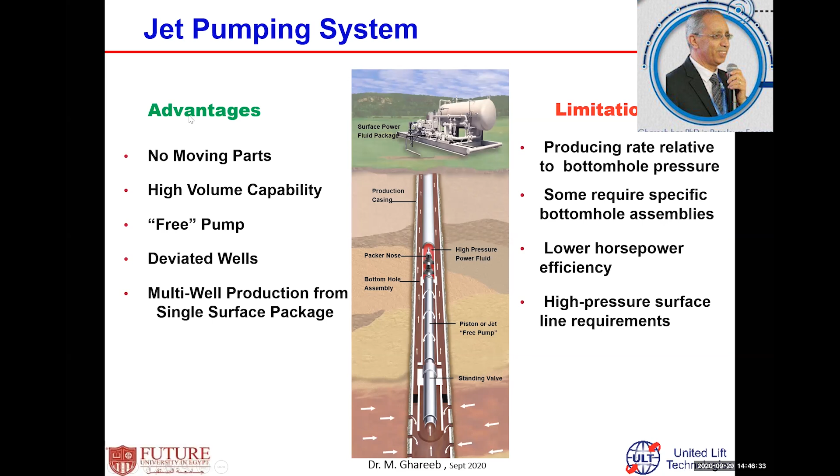But jet pump completion - what type of completion? Since the jet pump only depends on the completion and how it's run, what type of completion, how I complete it, how I produce - all of this matters.

With a jet pump application, I need 3 conduits. What do I mean by 3 conduits? I need 3 conduit pipes in order to produce the well. Why do I need 3 conduits? First of all, I need a conduit for the reservoir fluid, because there are packers, and below the packers there is fluid, and I need to separate and isolate the produced fluid from the injection fluid. This area inside the casing is what you call the first conduit.

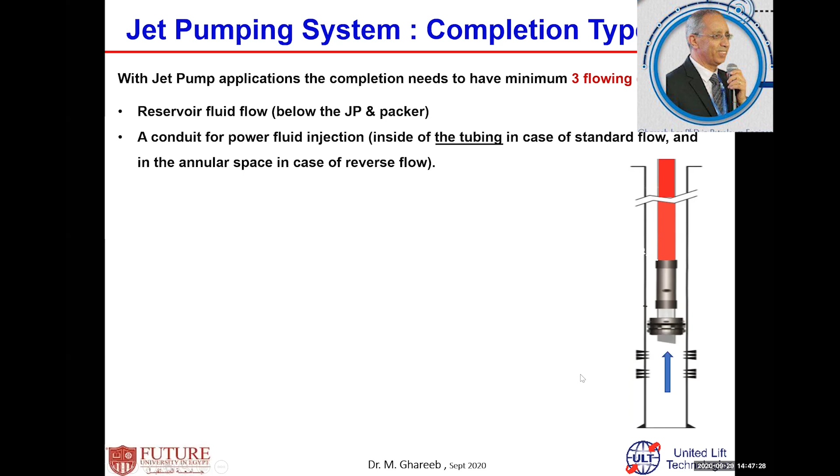What's the second one? I need a conduit for the injected power fluid, either inside the tubing for the standard configuration or inside the casing for the reverse configuration. Then this is the second one. What's the third?

I need my third conduit for production. Then I need fluid from reservoir to the tubing intake or pump intake, but for the power fluid, I need a conduit for fluid, and I need production.

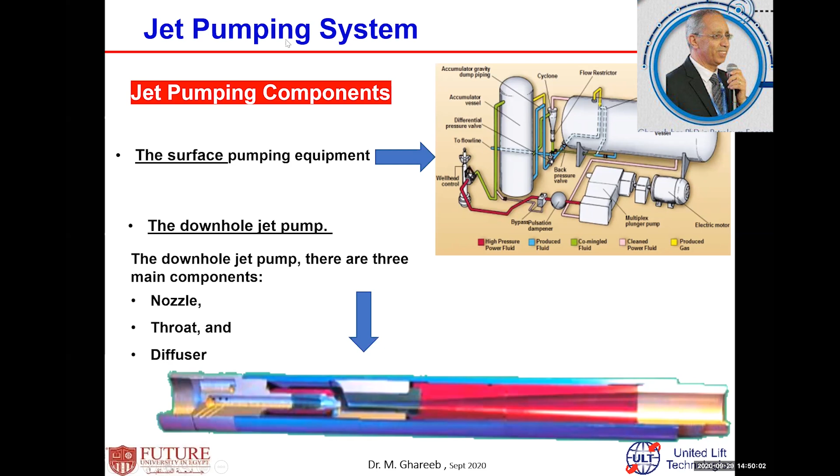What is a typical downhole jet pump? For standard downhole jet pump configurations, this is what it looks like. We said this is my well completion: this is a tubing, this is a casing, these are packers, this is a downhole pump. If you look from inside the downhole, this is the actual downhole pump.

Real downhole pumps have 3 main components. Usually downhole pumps have 3 main components: nozzle, throats, and diffusers. Here is the nozzle, a very small area, and these are the diffusers. These are the 3 main areas where the pump should be used in order to produce fluid, in order to generate the pressure in the formation. Other parts are just to complete the pump for the power flow path, for the production flow path, connections, and so on.

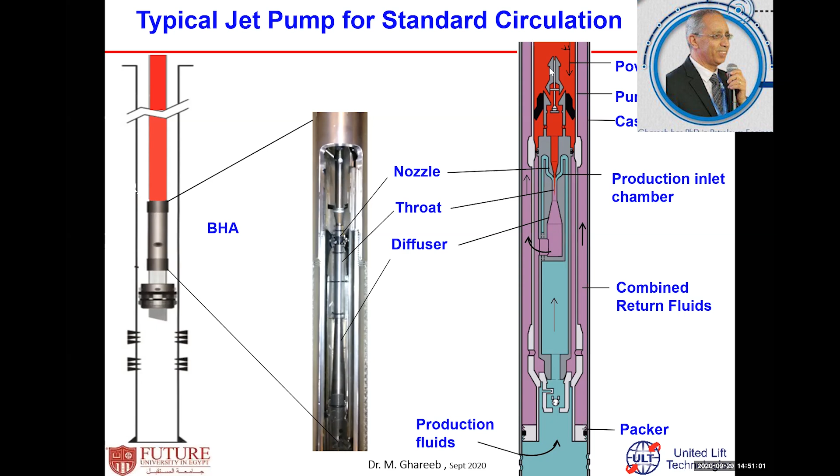For standard pump or reverse pump, there are 2 types of jet pump operations you find in the oil and gas industry. What's the meaning of the 2 pump operations and what's the difference between them? One type of operation, one type of pump, is called standard circulation pump. The other pump is called reverse circulation pump. What's the difference between standard circulation and reverse circulation pump?

For standard circulation pump, the power fluid is injected inside the tubing. And for reverse circulation pump, the power fluid is injected inside the casing, and the produced fluid is produced from the tubing.

Then I have two pumps, two options for the pumps - two standard pumps, or two different pumps. One is called standard circulation pump, the other one is called reverse circulation pump. In standard circulation pump, the power fluid is injected from the tubing, and the produced fluid is produced from the casing. For reverse circulation, it's vice versa: the power fluid is injected from the casing, and the produced fluid goes out from the tubing.

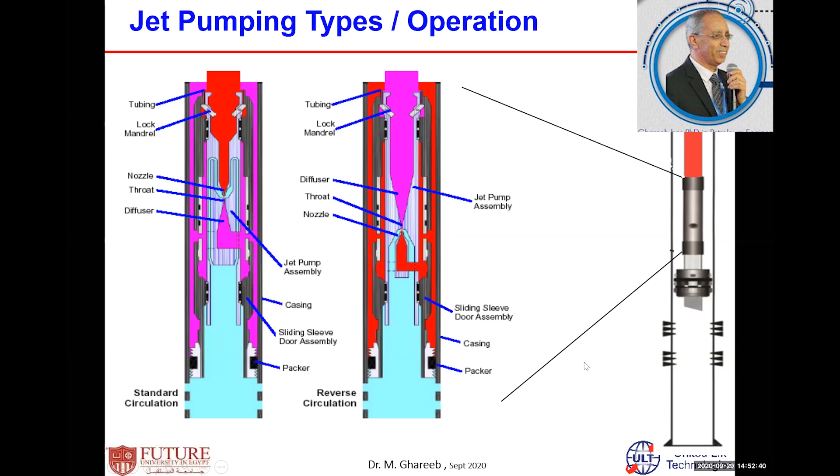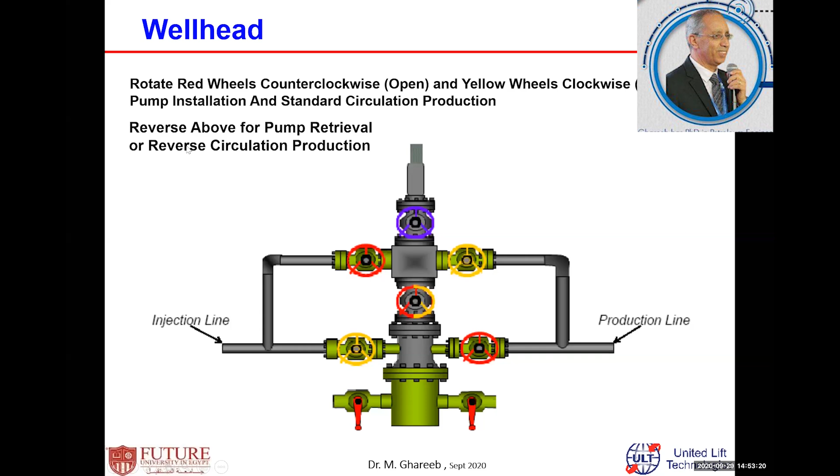How do jet pumps work? By increasing the pressures. It's hydraulic, and since it's hydraulic, the pump should increase the pressure. What's the principle of the pump in increasing the pressure?

The jet pump, when the power fluid travels - here is the nozzle, a very small area, few millimeters. It's the nozzle, and it has a high output pressure, with a high rate, assume 2,000 barrels per day, with a pressure when it reaches here around 3,000 psi. It all passes through an area around 5-6 millimeters.

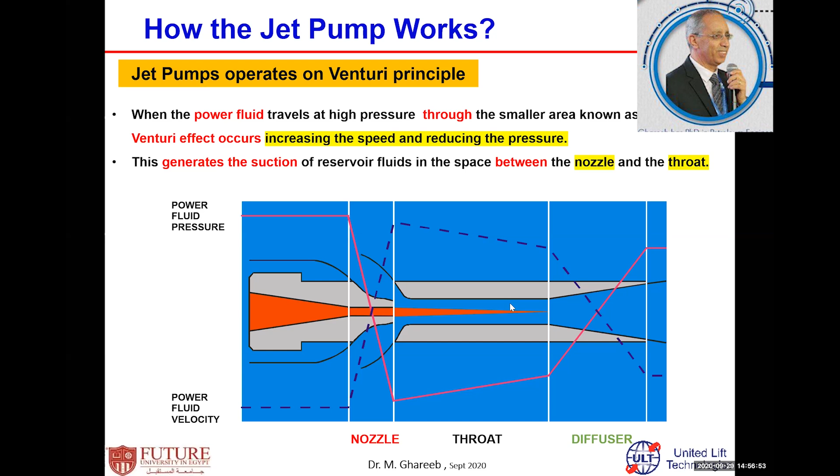However, depending on the ratio between the nozzle and throat, nozzle and diffuser, and all these areas, there are different types of pumps. It depends on this ratio, what we call the A ratio, C ratio, E ratio. Each manufacturer has a different configuration depending on the ratio between these areas. Depending on the ratio, you can have different pump capabilities in terms of pressure, flow rates, and so on.

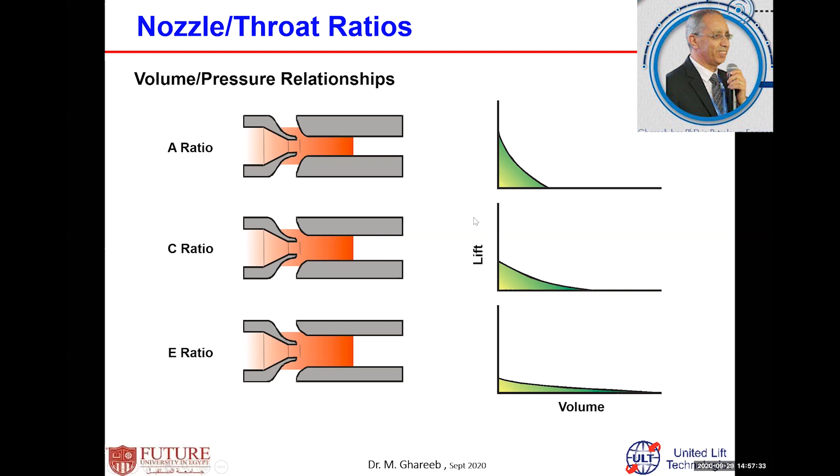This is just about the jet pump. What about the last artificial lift? It is a plunger lift. The plunger lift is one of the artificial lift systems.

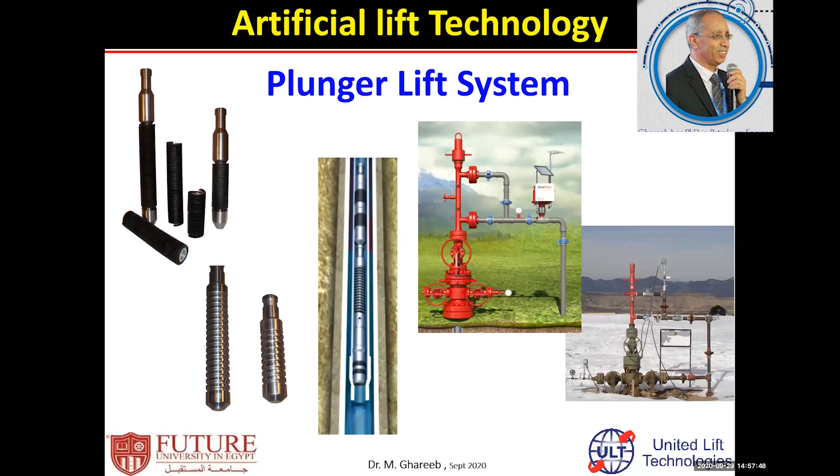It's commonly used with gas wells, especially with very high gas liquid ratio wells and very low production oil wells. This is just a shape configuration layout of the plunger lift. The plunger lift is an artificial lift system that doesn't use any type of pump or any outside source of power. It's usually used for low production wells with high gas ratio. This well should have low production and high gas ratio. It uses the well's own energy, the well gas, just to lift the accumulated liquid from time to time, like a cycling of this liquid.

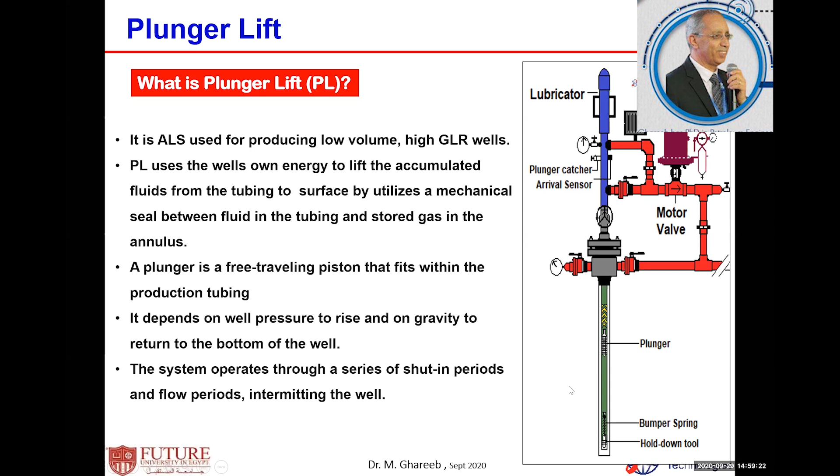Advantages of this system: it requires no power to run, just using the well's pressure and gas energy to produce the well. There's no outside energy needed, just the well's own energy to lift the well. It's easy to maintain, no pumps, nothing complicated downhole, very easy to maintain and so on.

It can also be used to keep the well clean. The plunger going up and down always keeps the tubing clean from paraffin and scales, whatever problem you have. It's excellent for a small field, or if you have a very small field or even one well, I can move it from one well to another. It's very good for high gas ratio wells, and it's the cheapest artificial lift system.

But remember, since there is no outside source or power used for these wells, there should be a certain criteria to use this system in order for it to work. This type of artificial lift requires certain criteria to be achieved. What criteria is this? The gas liquid ratio should not be less than a certain value; sometimes people prefer it to be higher.

Not less than 300 standard cubic feet per each 1,000 feet of the well. What does that mean? For example, if I have a well produced from 1,000 feet, then the gas liquid ratio should be not less than 300. If I have a well produced from 2,000 feet, then the gas liquid ratio should not be less than 300 multiplied by 2, which should be 600. For 3,000 feet wells, the gas liquid ratio should be at minimum 300 multiplied by 3, which should be 900 standard cubic feet.

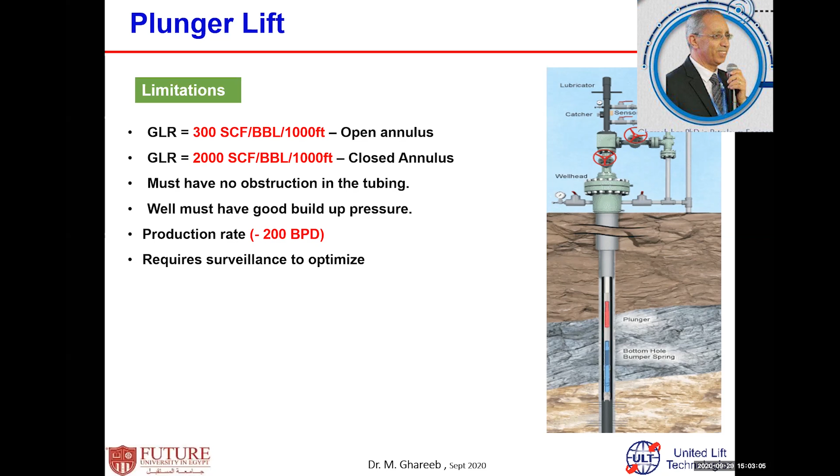In application, it can be used for different types of wells, mainly gas wells with liquid loading, mainly for dewatering gas wells, unloading naturally flowing wells, and shut-in wells, but they should have a very high gas ratio.

It can just be used in combination with what? In combination with intermittent gas lift, to reduce the volume of gas used for intermittent gas lift.

This can be used to clean the wells, if there is some paraffin, some scales, and so on.

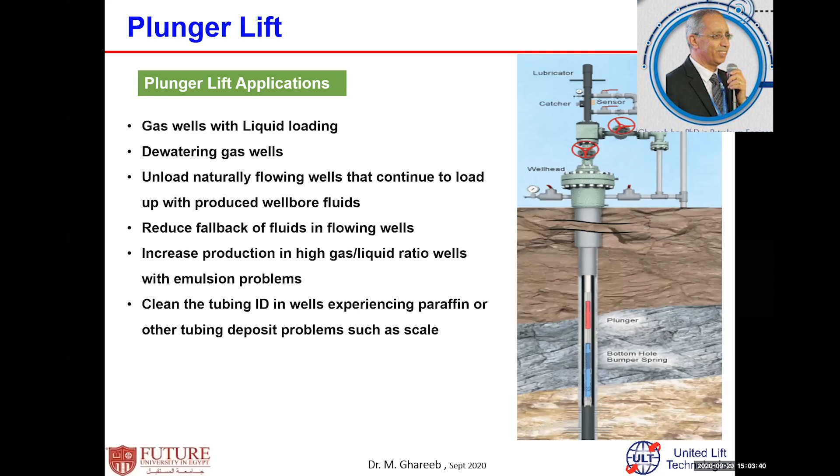What are the components? You have two main components: surface and downhole. The downhole component mainly has three main parts: the plunger, bumper spring, and landing nipple. The spring and landing are fixed downhole. The plunger is moving inside the tubing from the bottom to the top.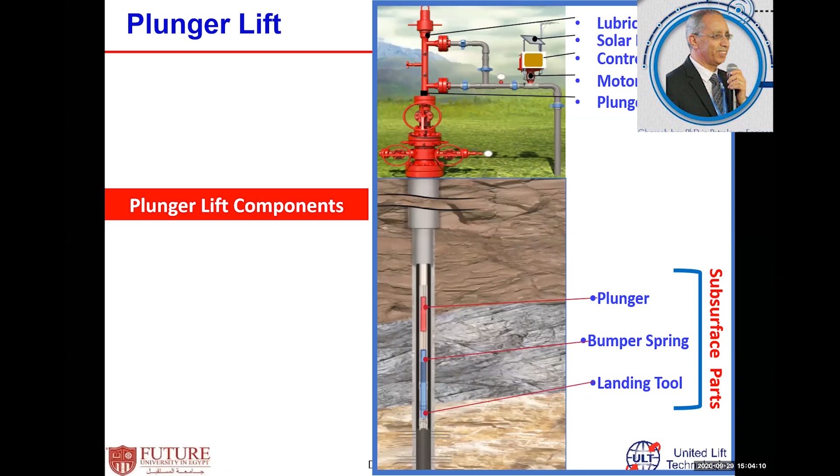Plus I have the wellhead components, which are the lubricator, control valve, motor control valve, sensors, and also solar panels - all these components. Let me just go through them one by one and show you pictures of some of these and how they look.

Plunger lift components, as I said before: we have the plunger. It's the moving part, the heart of the system. It's considered like a pig, which moves the fluid, pushing it from inside the tubing to the surface. It's a device that provides a seal for the fluids inside the tubing to deliver the fluid to the surface.

There are different types of plungers, depending on the well condition, downhole parameters, downhole pressures, gas liquid ratio, pressure build-up, and so on. There are different types of plungers and so on.

There is also a bumper spring installed at the bottom of the well. The bumper spring is used just like a shock absorber for the plunger, because the plunger is traveling to the surface. What's pushing the plunger is the gas below it, pushing the plunger to the surface. But the plunger returns to the well by its own weight, falling back down using gravity under its own weight.

Due to the velocity and impact of the plunger, you need to have something like a shock absorber to absorb all the force of the plunger when it hits the bottom hole condition. There are also different configurations of the bumper spring and so on.

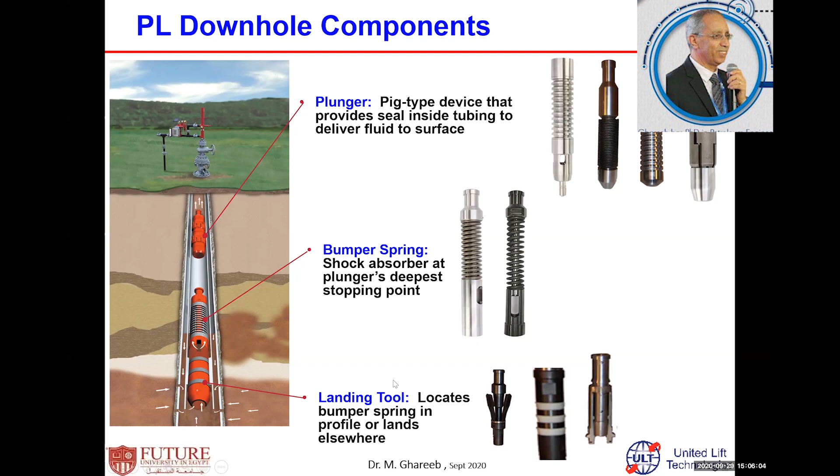Plus the landing, where the bumper spring will be stopped. And how can I isolate it, just from inside the tubing, from below the plunger and above the plunger. There are also different types of what we call landing tools, and so on.

The surface equipment: here I have the lubricator. It's one of the main important parts for the plunger lift, like the plunger itself. It's the topmost part of the plunger lift assembly. There are different configurations, different types of lubricators - either can be threaded bottom or can be flanged bottom.

Connections can be in this connection or that connection, how it's connecting for the flow, connecting all that, where the sensor is connecting, which can catch the plunger inside it, if the plunger or even if I need to change the plunger, and so on. I have a sensor just to sense the plunger when it's reached the surface.

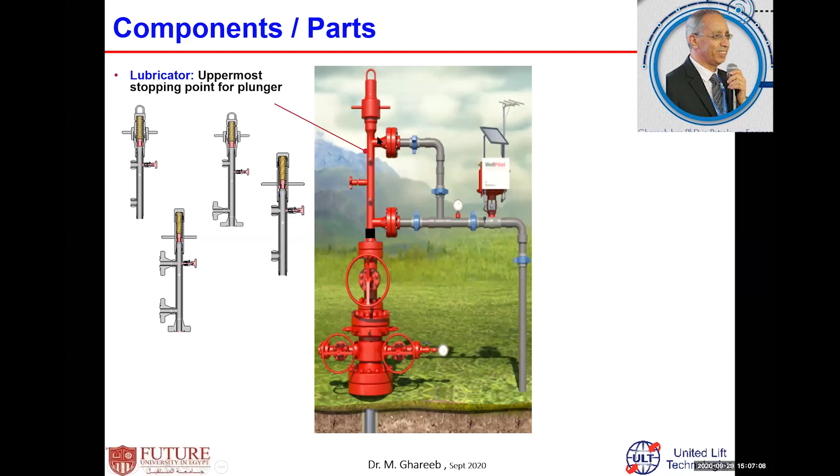When the plunger reaches the surface, the sensor signals these valves to open or close, and it can change the direction of flow and so on. This is what we call the motor control valve, which can be opened and closed.

The motor control valve just depends on a pressure activated design. It will sense the casing and wellhead pressures, and based on these two pressures, it can sense the difference and open or close in order to allow the plunger to run or just keep at the surface.

Plus, I have what we call the well controllers in order to control all these systems. The well controller is operated by a small solar panel. There is no outsourced power unless this small solar panel is used.

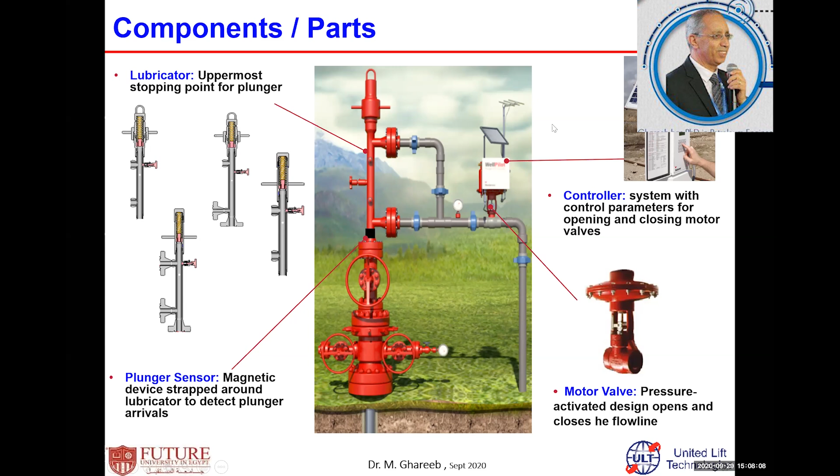How is the plunger lift operated? There are 3 stages of operation for the plunger lift: off stage, on stage, and after flow stage. The operations, what does that mean?

The off stage means the well in this case is turned off, closed from here, no flow, there is no flow just for the well going on, and the plunger starts to go down. You close the well from here, the plunger falls down until it reaches the bottom of the tubing here, at the bottom of the tubing.

What will happen for the on flow? On flow, the well is producing and the plunger is traveling. When the gas here has enough pressure to lift the plunger, where the plunger lifts the fluid, enough pressure to lift the plunger with the fluid over the plunger. This is the amount of fluid which is built up and accumulated inside the well during the off period.

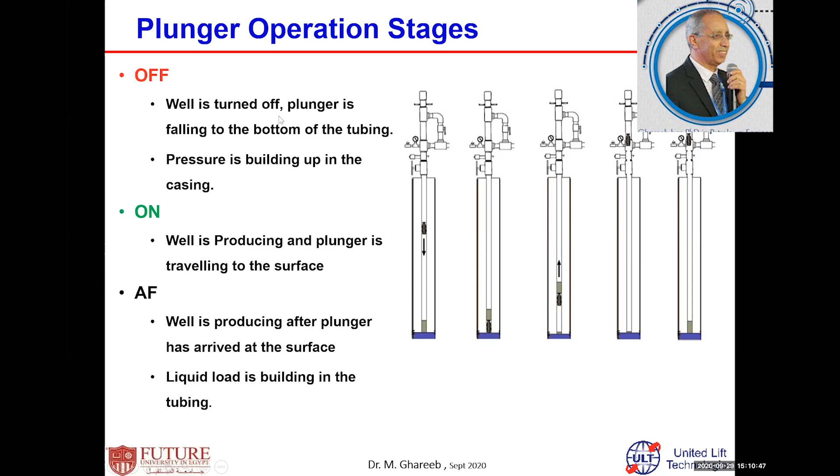The well starts to be produced and will flow until the well starts to cease to flow, because with time this amount of fluid will start to drop back due to low velocity of the fluid and so on. When this fluid starts to drop back, the well gives a signal to the plunger, and the plunger starts to go down again, and the period repeats: off stage, on stage, and after flow stage.

This is just a general overview about the plunger lift.

Let me give you some hints, one slide, about the future of artificial lift. Currently, a lot of people use a combination of artificial lift, combining different types of artificial lift to maximize efficiency of the lifting techniques.

Some people use gas lift with ESP. Some people use plunger lift with gas lift. Some people even use rod lift with ESP, and so on. There are different combinations, plunger lift with gas lift, and so on. This is in order to increase efficiency on the power.

One of the very important summaries I'd like to remind you about is artificial lift selection and design. You need to know what challenges you will face in selecting your artificial lift, and what challenges you will face in operating your artificial lift.

Usually, difficult fluid is one of the main important challenges: high viscosity, high water cut, high gas ratio, fluid with high sand content, or a combination of all that. This is a difficult fluid. Corrosive fluids, very high corrosion, H2S, CO2, all this is a challenge.

What type of artificial lift do I need to select to have a very long running life, very high operating times, very low operating cost, and so on? What are the well conditions? Where is the well working location - offshore, onshore? What production - stable, high, low production? What's the hole consideration - deviated wells, dogleg severity, horizontal wells, and so on? What type of reservoir - conventional, unconventional, depletion drive, water drive, gas reservoir, oil reservoir?

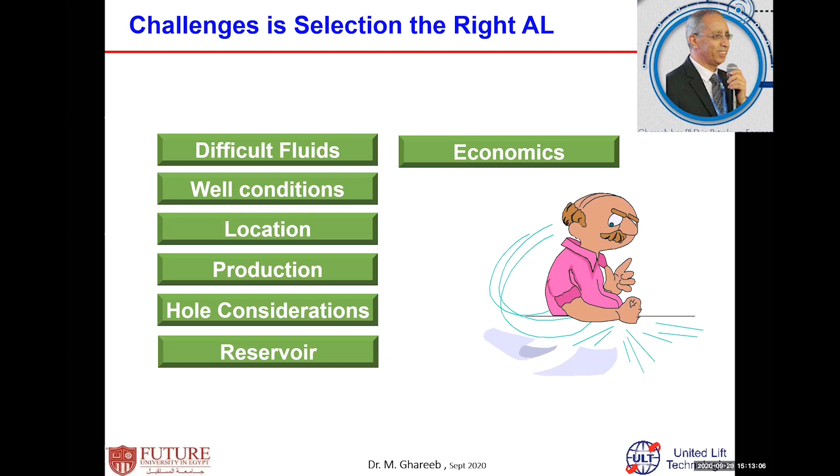Then, what you need from your artificial lift - remember this four very well. You need your artificial lift to maximize its output, and in order to maximize that output, at minimum you need four things. You need to ensure the equipment is producing in the optimum condition. You need to have minimum possible equipment downtime - if you run continuous equipment, no downtime due to failures.

Also, you need to minimize the intervention frequency. If they were running without any workover, without any servicing, this will be great for the well. You need to minimize this as much as you can, for economics and for safety point of view.

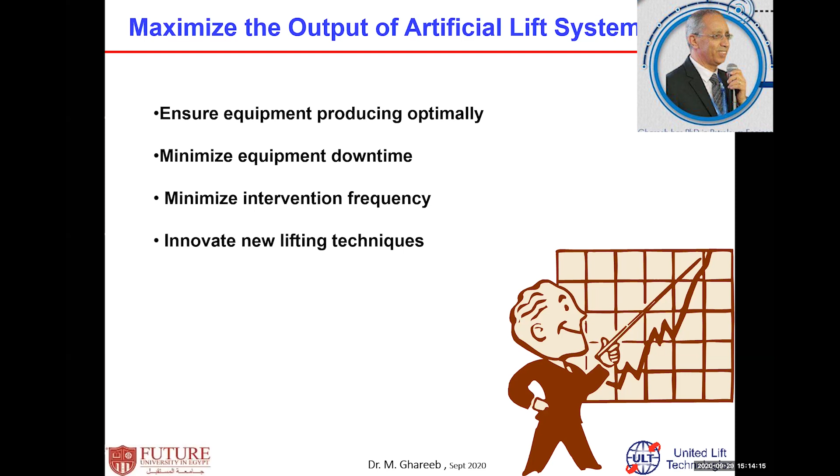Try from time to time to introduce innovative technology, not to depend only on old technology - you can face a lot of problems and maybe not be able to solve them. Currently in the market, there is new technology that can overcome all the problems you can expect and what you have.

Then, at the end, optimization. Always try to optimize your condition, your well, and so on. What does optimization mean or what is just needed for you? You need to manage production of hydrocarbon. Things change over time - remember, the well conditions, the flow conditions, the parameters, everything changes with time, changes with production.

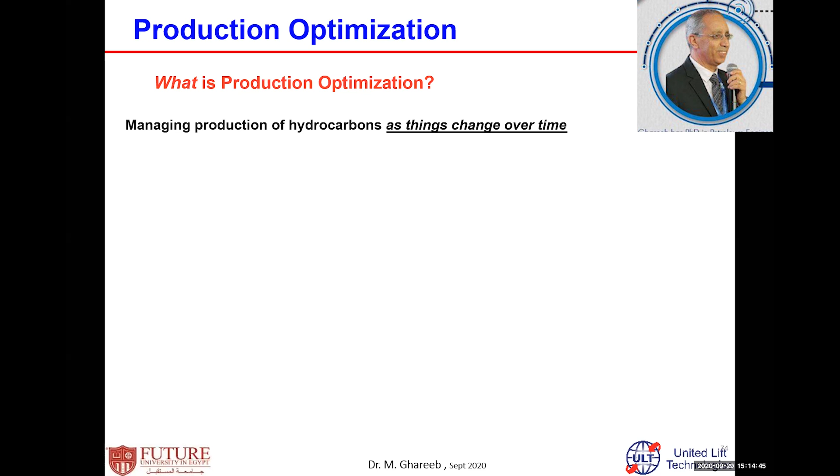Then you need, from time to time, to always optimize your wells. You need to implement the best lift technology, and this can be from the starting point - as a good start for you, what's the best artificial lift technology you need to implement?

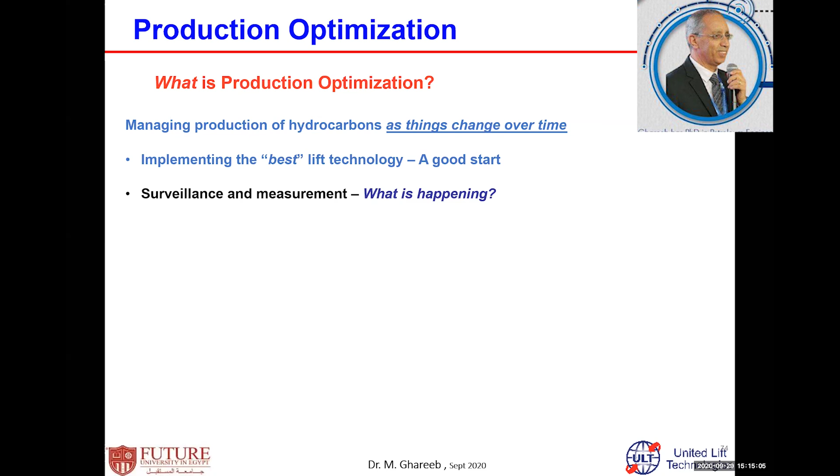Surveillance and measurements - what happened? This will tell you what happened. Continuous surveillance, measurement downhole, surface, and so on will always tell you what's happening, what's going on. Analysis will allow you, from the data and measurement collection, to do analysis of what's going on, what happened, and what can be expected for this well - what's the design solution, how can I improve my performance, how to manage my assets, and so on. At the end, my KPIs and the feedback - I need to monitor my KPIs, report my KPIs, and the feedback, and so on.

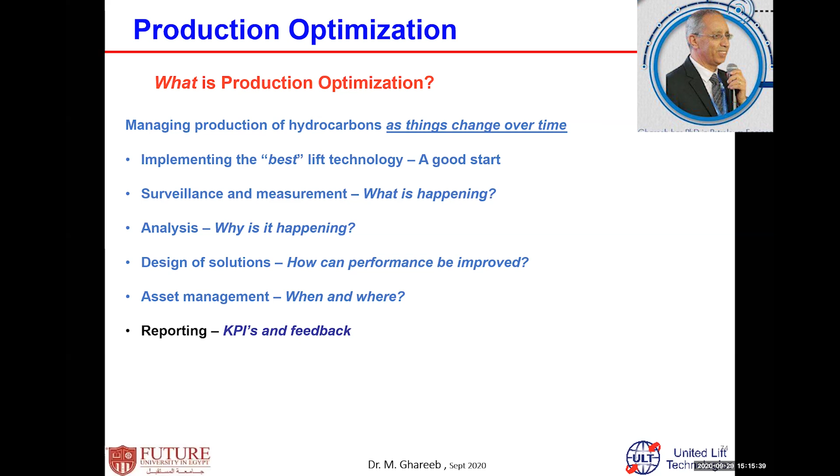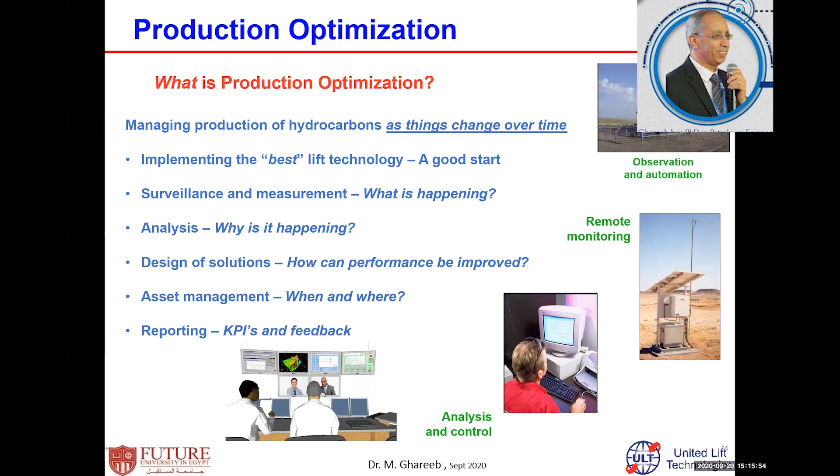Then observation and automation - remote monitoring, continuous monitoring, continuous analysis, teamwork, innovation, technology - all of that will help you improve your artificial lift technology and its output.

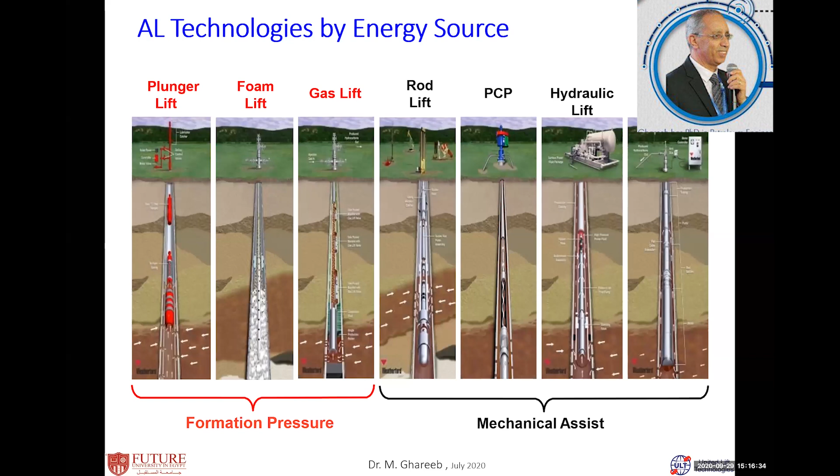This just concludes what we are talking about as general artificial lift. This is the main type of artificial lift in the market. This course is fundamental principles. Inshallah, we plan for other courses like design, operation, troubleshooting, and so on, for more advanced courses. But for the more advanced courses, you must pass this course in order to attend them.

When you select your artificial lift, use some guides in front of you. When you're screening artificial lift, use some guides in front of you, and so on.